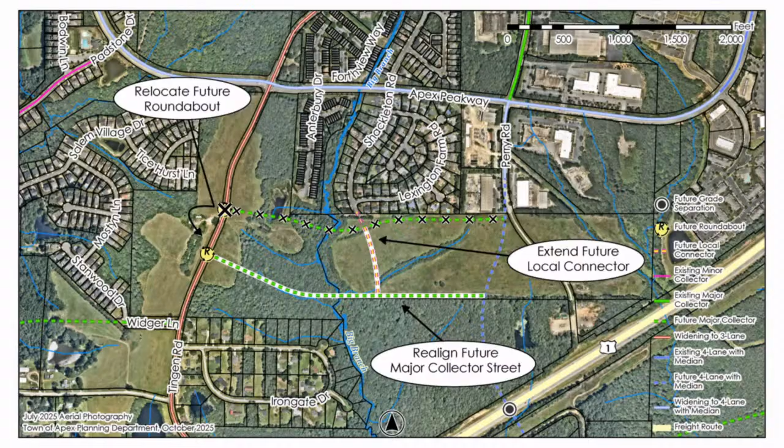Thank you, Shannon. Are there any questions for Shannon? Okay, being that this is a public hearing, we'll go ahead and open up the public hearing for this item. Sir, if you could please state your name and your address.

Good afternoon, Lawrence Kevin, 1628 Salem Village Drive. I was reviewing this. The one thing I read is that the stream crossing is dependent on the Army Corps engineers, so that can factor into whether or not it's going to happen. Stream crossings are generally very expensive, so it'd be nice to have some kind of cost associated. I think Hopson was responsible for 50%. I don't know where the other 50% is coming from. Seymour Tingen is on hold, or it's not happening.

The other thing I want to point out is the way it's drawn, the roundabout for the master plan submitted August 1st for Seymour Tingen had a multi-use area, and that was kind of where you exited out for that. So that's kind of where the roundabout was. The road also does not line up with the plan submitted August 1st, I know it's suspended, but it does not match up with the master plan submitted. That was quite a bit of work involved for the Tingen alignment. Jeff Roach can probably speak to that better than I can. That's just a couple things I want to point out that don't seem to make sense to me, and there's some costs involved that the town needs to consider.

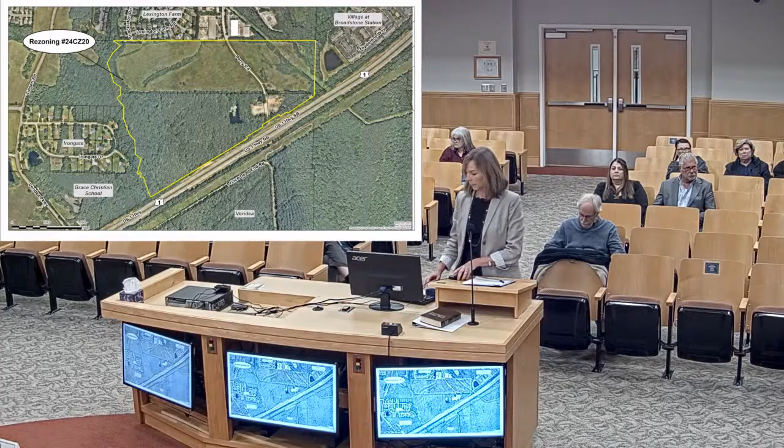So the applicant, Acre Manager LLC, and the Town of Apex have entered into a land exchange agreement, approved by the Town of Apex Council on October 8th, 2024. They've exchanged some property. Perry Road on the transportation plan is supposed to be realigned, and that's where they drew the line for swapping between Acre property and Town of Apex properties. This gives more developable sites for each applicant, giving Acre Manager 58.54 acres, and the town will have 39.62 acres.

The current zoning is residential, agriculture, and light industrial conditional zoning. Looking at the zoning around the surrounding project: this is manufactured housing conditional use, Lexington Farms; Seymour PUD is a plan unit development; Iron Gate and Grace Christian School, which is being constructed right now, is rural residential; and off to here is the Broadstone Apartments, also a plan unit development; and Tech Flex, some existing industrial buildings right here in the light industrial.

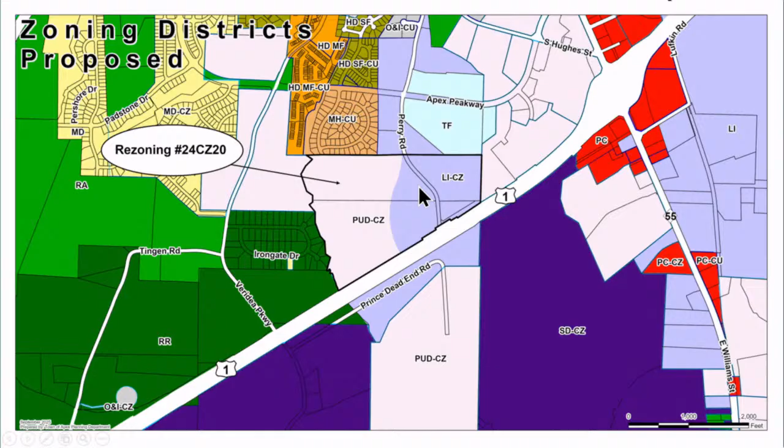So the proposed zoning is planned unit development conditional zoning, and that's going to line up to where Perry Road's going to be realigned, and then light industrial conditional zoning. Looking at the 2045 land use map, it's office employment, and then office employment and industrial employment.

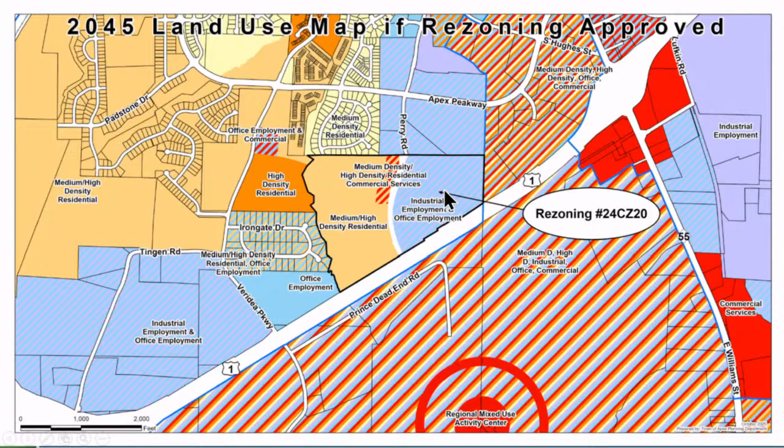So if approved, on the west side of the realigned Perry Road would be medium-high density residential and medium-high density residential with commercial service along Perry Road, and then industrial employment and office employment, which would stay the same for the Town of Apex site.

Existing conditions on the acres include some fields and mature trees along here. There is a creek along the western property line, and on the Town of Apex side, again some fields and mature trees with a pond, and there's a small Town of Apex facility down here.

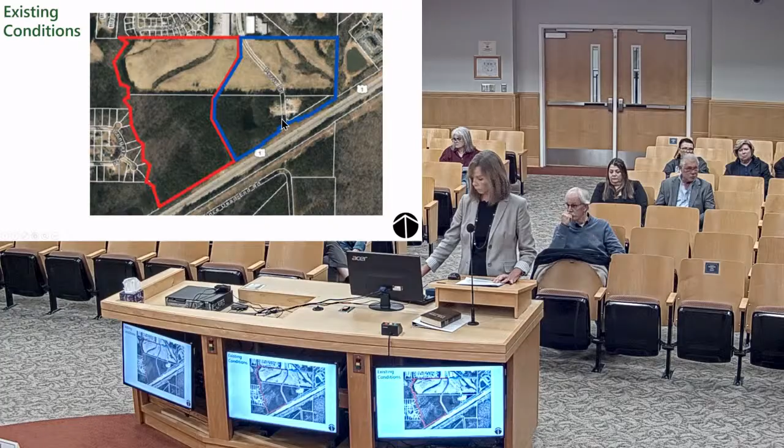A 60-foot type A buffer shall be provided along US Highway 1, except for the electric substation, where no buffer will be required. If other permitted uses are visible through the electric substation or associated lines, those must be screened from US Highway 1, with a 10-foot type A standard.

These conditions state that all other standards of the UDO may be varied based on the financial and operational needs of the Town of Apex, but any changes to the site shall be required to be shown on the site plan for a technical review committee review and comment, and made available to the public on the interactive development map. These variations included...

The existing Perry Road, road improvements to the new aligned Perry Road, the tree survey and trees. Outdoor storage is allowed as a standalone use. RCA relocation to accommodate future development with adjoining properties.

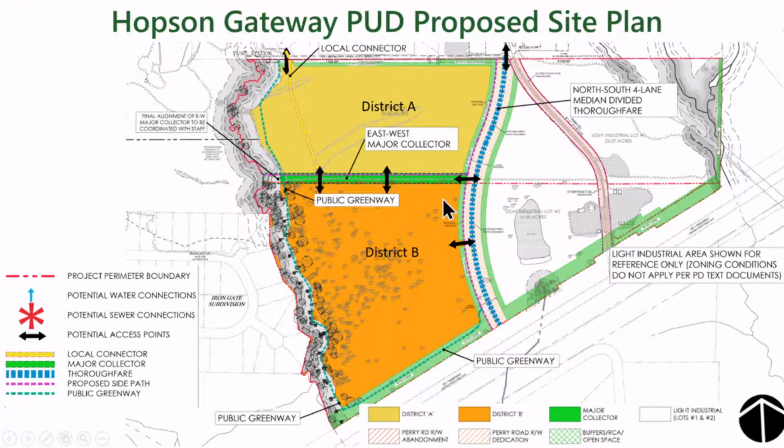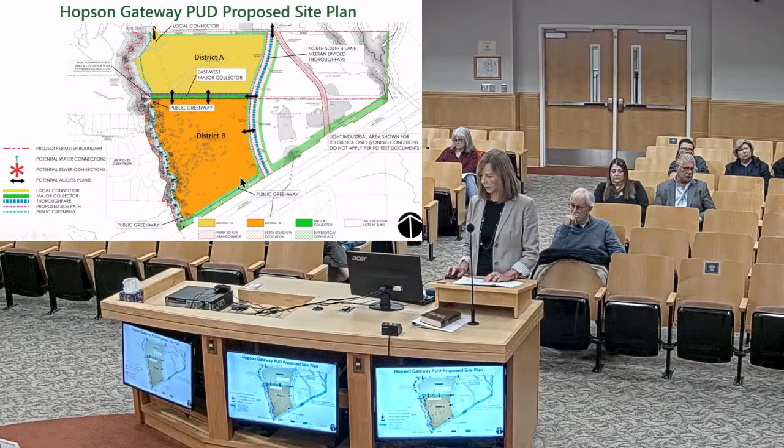There's an existing stub street with Shackleton Road, which will be connected through the development to the major collector. Perry Road will of course be realigned, and these arrows indicate potential access points. A public greenway is located along the stream, and then along the southern buffer from Highway 1 to Perry Road.

Permitted uses for District A are single-family townhouse, live-work townhouse, and small-scale multifamily with accessory apartment, plus recreational uses. For the live-work townhomes, they would be located just along Perry Road, and the only permitted non-residential use in the live-work townhome would be office, business, or professional.

District B would include townhouse, small-scale multifamily, accessory apartment, and recreational uses. The Hopson Gateway site is located within the transit development area, which supports apartment use within the medium-high density residential classification.

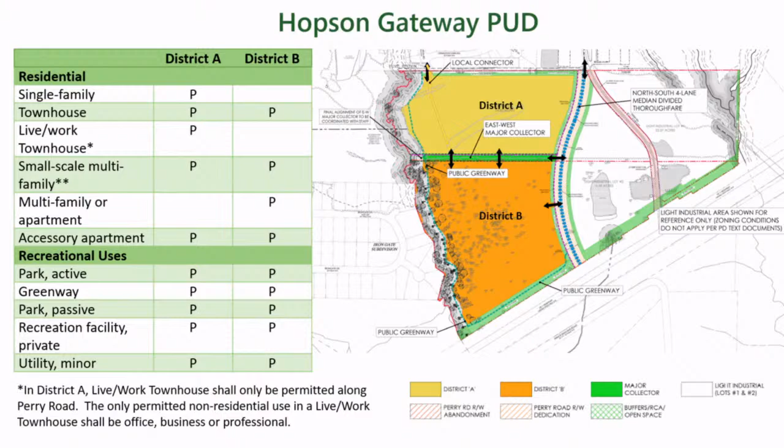There is another condition that says townhouse and/or small-scale multifamily units may be developed and constructed in District B before any apartment units are developed, provided sufficient land in District B is reserved to accommodate the future construction of at least 300 apartment units.

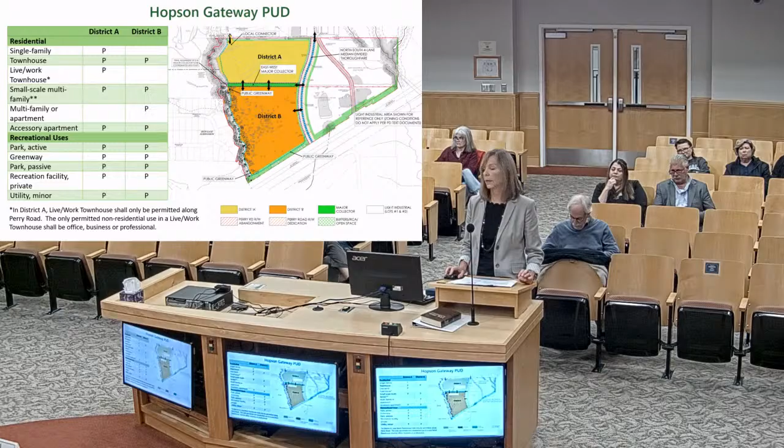Moving on to the transportation improvements: the Apex Peakway and Perry Road intersection includes restriping, additional lanes, and installation of a traffic signal based on NCDOT approval, which involves timing, warrant study, and fee in lieu if the signal is not installed.

For the Apex Peakway and Tingen Road intersection, the developer shall pay a fee in lieu equal to 10% of the estimated cost to design and install a traffic signal and additional lanes.

For the construction of the east-west major collector, this includes bike lanes and a 10-foot side path, and a 5-foot sidewalk on the other side. Perry Road will be designed, constructed, and realigned as a 4-lane median divided thoroughfare, including a 10-foot side path on the Hopson Gateway side, and a 5-foot sidewalk on the Town of Apex side.

The southern terminus of Perry Road shall accommodate the anticipated future bridge elevation over US 1 and additional lanes at the intersections. We passed out 2 additional conditions for easements: a transit easement along the major collector, and a construction easement for the future bridge over Highway 1. Staff and the applicant have been working on these 2 additional conditions, and we're agreed upon that.

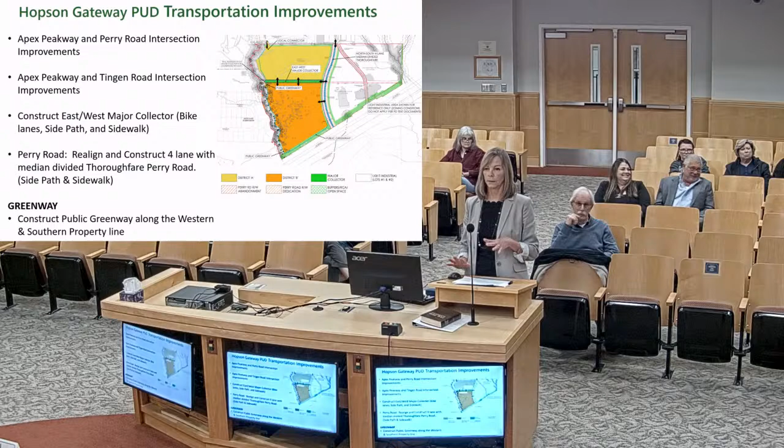Next is the proposed utility plan, just showing the sewer and water connections.

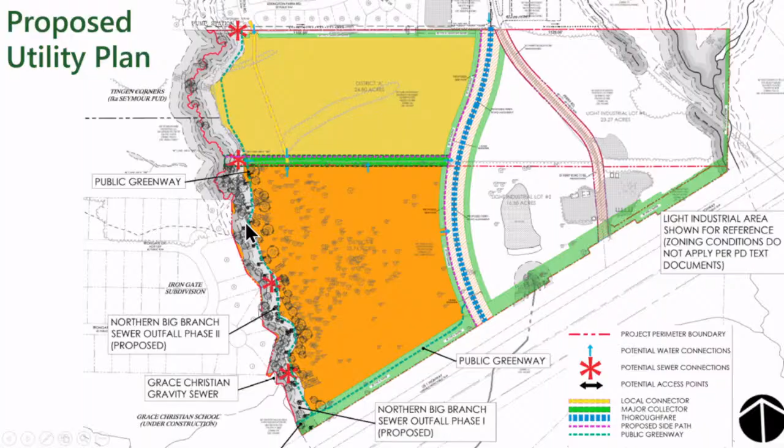The RCA requirement is 20% for this area. Looking at the buffers: 20-foot type B along Lexington Farm subdivision, and once we get up to the light industrial existing site, it'll be a 40-foot type A buffer. Along the west side of Perry Road is a 30-foot type B, and on both sides of the major collector, a 10-foot type B. Along US 1, there'll be an 80-foot type A buffer, and this includes a greenway.

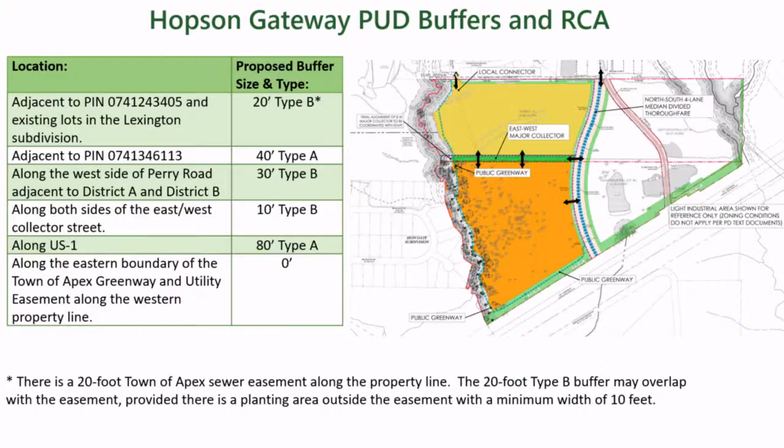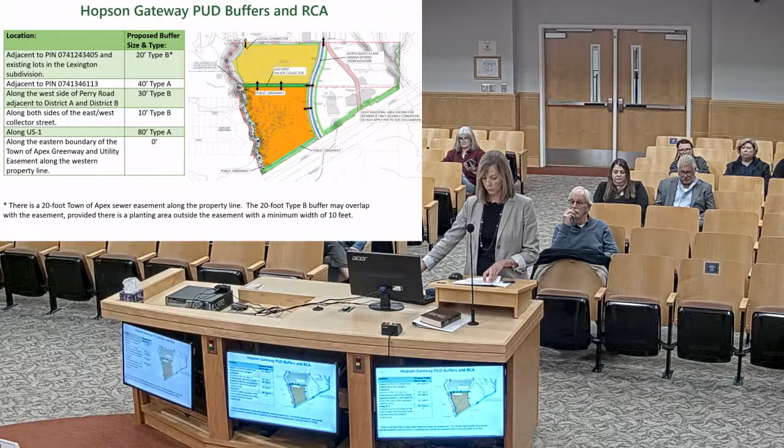The Apex Environmental Advisory Board held a meeting for this rezoning on January 16, 2025, and the PUD includes 6 environmental conditions: native plantings, warm season grasses, green building certifications for the apartments, pet waste stations, and a 220-volt outlet in the garage for the townhomes.

The applicant is also providing an affordable housing condition, a minimum 20% of total apartment units in District B, for households earning no more than 80% AMI, for a period of 30 years. There's also a condition that small-scale multifamily can be developed in District B as long as sufficient area is reserved to accommodate the 300 apartment units.

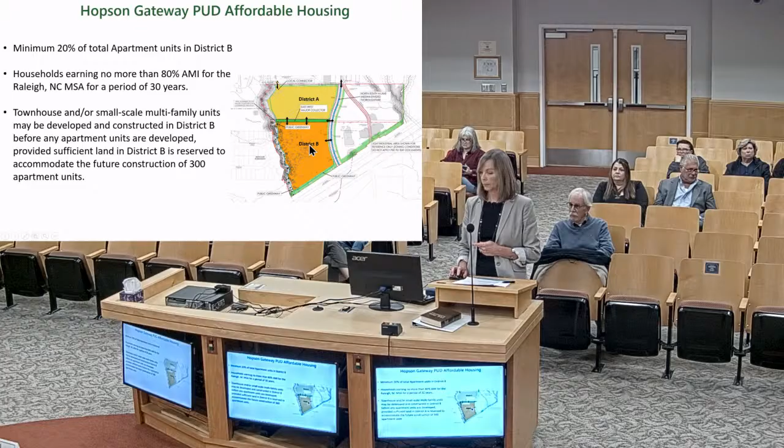For the design standards and architectural conditions, setbacks are included for single-family townhomes, front-loaded, rear-loaded, and parking lot style, apartments and recreational facility. Single-family minimum square footage for the lots is 5,000, and maximum building height is 3 stories or 45 feet, and apartments are 4 stories at 60 feet.

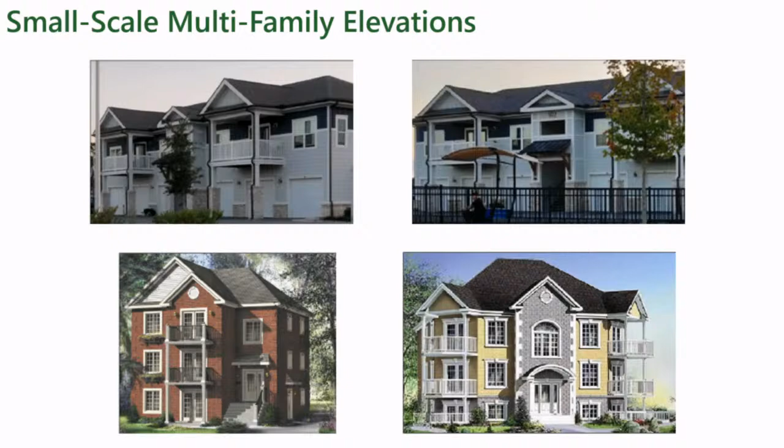Here's some concepts of the townhouse elevations, then the small scale multifamily elevations, apartments, and then the single family elevations.

The architectural conditions address material, trim, garage door design and setbacks, roof line, and color palette, to make sure we have 3 or more palettes for each townhouse and single family.

The parking for apartments: 1 or 2 bedroom units is 1.3 spaces per unit, and 3 bedroom units is 1.8 spaces per unit. All other development will comply with the UDO.

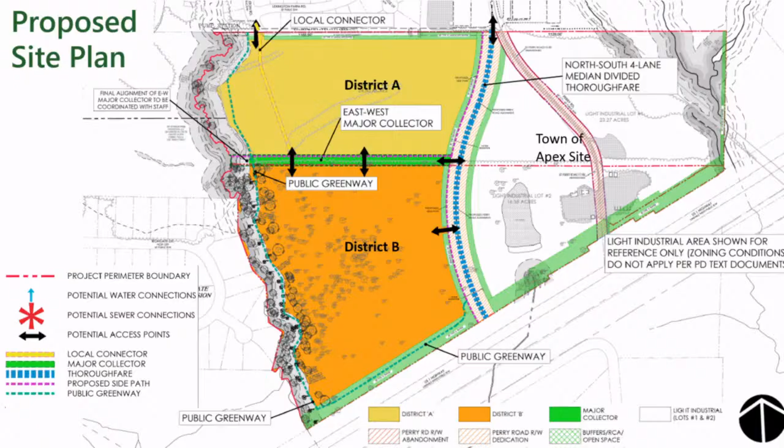On February 26, 2025, the Parks, Recreation and Cultural Resources Advisory Commission recommended a fee in lieu of dedication with credit for construction of the Greenway. The Greenway in District A shall be completed prior to 25% of the total residential units in District A. For District B, the Greenway shall be completed prior to 50% of the total residential units in District B.

The analysis statement of reasonableness of the proposed rezoning: the Town of Apex site rezoning to light industrial conditional zoning is consistent with the 2045 land use map. The proposed Hobson Gateway planned unit development conditional zoning district includes residential densities between 9.7 and 11.5 units per acre, and that area along Perry Road would allow potential for live-work townhomes for office and professional uses within the townhomes.

The Hopson Gateway site is located within the transit development area, which does support apartment use within the medium-high density residential classification. If the Hobson Gateway properties are rezoned as proposed, the 2045 land use map will automatically be amended to medium-high density residential and medium-high density residential/commercial services, per the North Carolina General Statute.

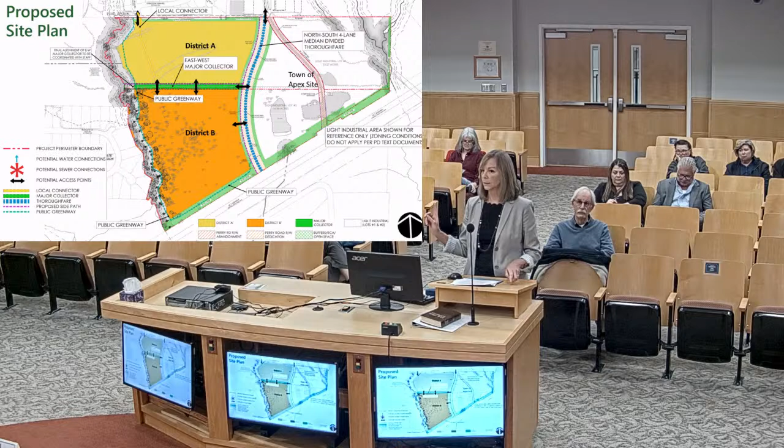If you had any questions, the applicant is here, and I believe they have a PowerPoint presentation. In addition, we did receive 2 emails on October 27th and October 28th in opposition.

Thank you, June. You're welcome. Does anybody have any questions for June?

June, I want to know about Shackleton Road. Will it connect to that? Yes, because that's a UDO policy to connect a road there. With the east-west connector, will they just stub it at the property line, or extend it to Tenjin Road with this development? Just want to clarify, because we saw the map with the realignment showing the full connection from Perry to Tingen, but this development is just going to consider their portion of that realignment. Right, I think as far as the east-west connector goes, that's correct.

June, for that 20-foot buffer between the neighborhoods that already exist, is that what you said, going along the northern part? Yes, that's for the neighborhoods, a 20-foot type B buffer. And what exactly is that, the type B? The type B is semi-opaque, so not completely screened. There are just some areas where you could see through.

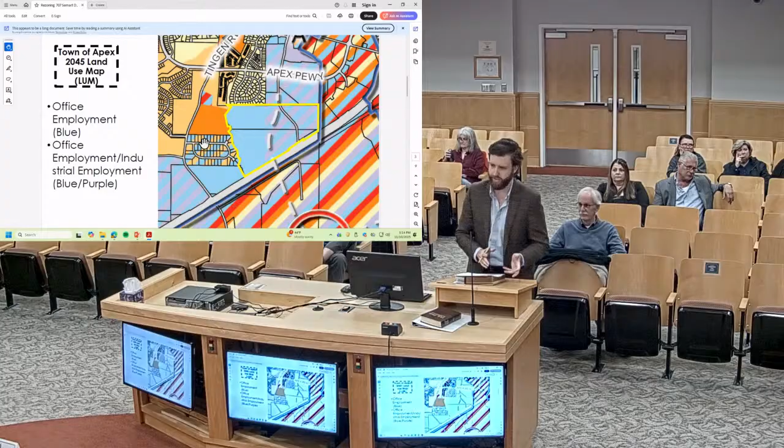The land use map here is office employment and office employment / industrial employment. You can see there's some industrial striping on both sides of Perry Road. With any project in Apex, we looked at this map at the very beginning of the process to determine what uses are appropriate here. We saw a lot of office, which was difficult because of the office market — there's still a lot of vacancy, not the same as it was pre-COVID.

There's also the adjacency of office and industrial uses to established neighborhoods west of Perry Road. So what I'll explain in a moment is how we tried to reconcile the land use map with our plan and the town's rezoning, to determine what made sense here from a planning perspective to transition into residential with those existing neighborhoods west of Perry Road.

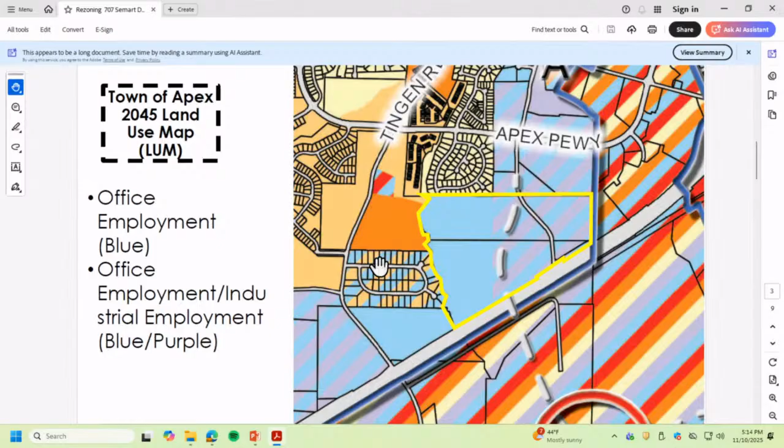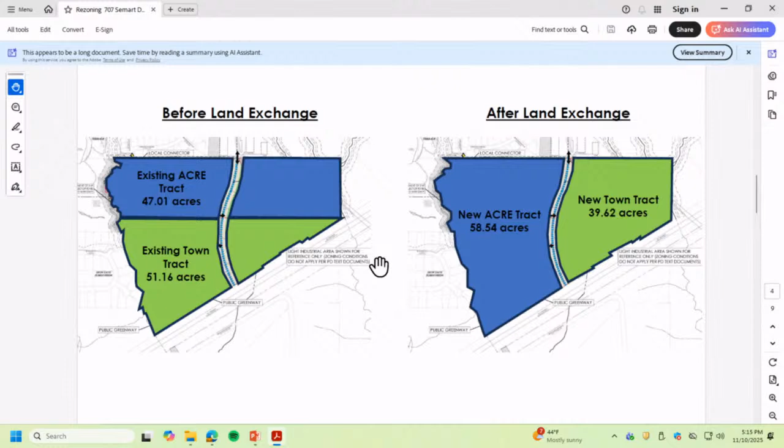The land exchange reconfigures both pieces as shown on the right side of the screen. Acre is getting more land than the town is receiving — if you read the land exchange agreement, they're paying roughly $180,000 an acre for that additional land, so a little over $2 million to make sure it's an even exchange of value between the town and Acre. We wanted to get the land exchange in place in October, and then we filed the rezoning application along these lines.

The blue portion is the PUD we've been talking about, and the green is light industrial. I know June went through that, but if you read the application there are all these different legal descriptions and it's a little confusing, so I think this clarifies it.

The overall concept plan: the white area is the town's property, the LICZ rezoning, and the Hobson PUD is on the left side of the screen in yellow and orange. We have two districts — District A in yellow, which will be townhomes, permitting up to 220 townhomes.

That's a maximum density; we haven't laid out the site. Once we lay out play lawns, RCA, etc., it may be under 220 with the subdivision plan. Separated by the major collector street is District B, a max of 400 townhome and multifamily units. As mentioned with the land use map, the goal was to keep industrial and office uses east of Perry Road and transition to residential on the west side. These tracts are higher in density than some subdivisions to the west.

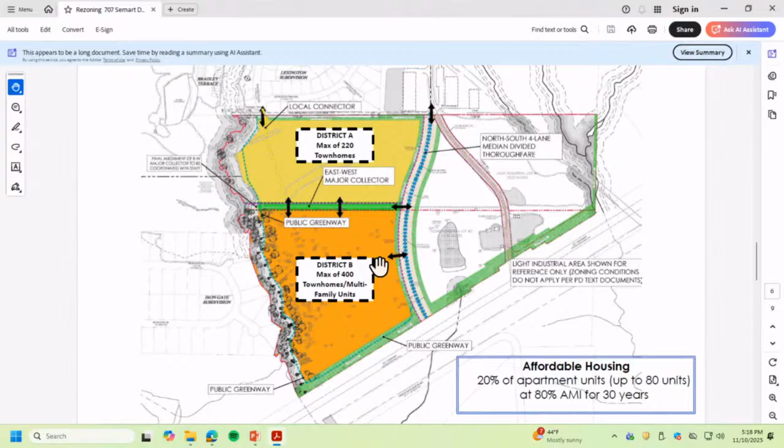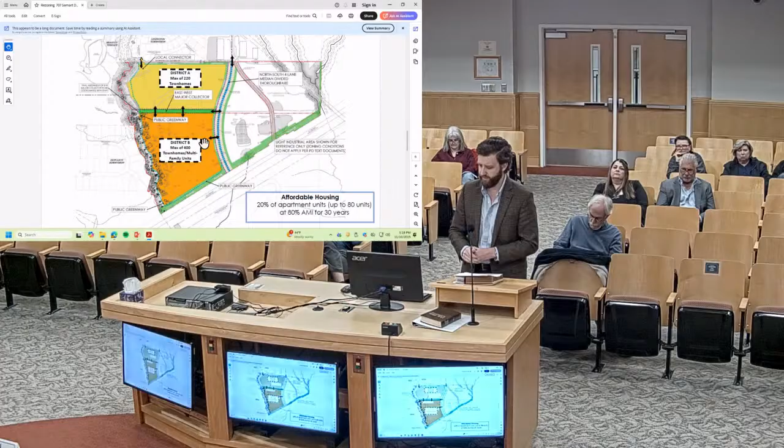The other piece of this is the affordable housing commitment. When we filed this case in November of last year, the town's policy recommended 5% of units at 80% AMI. In June, it was updated to recommend 10%. What we're proposing is 20% of the apartment units will be affordable at 80% AMI for 30 years. If you take that number of units, 80 out of 400, over the whole density of the site, it's about 13%, which is still above the policy recommendation. We also did it for 30 years, where some policy recommendations are for 20, extending it to target a workforce housing range at 80% AMI.

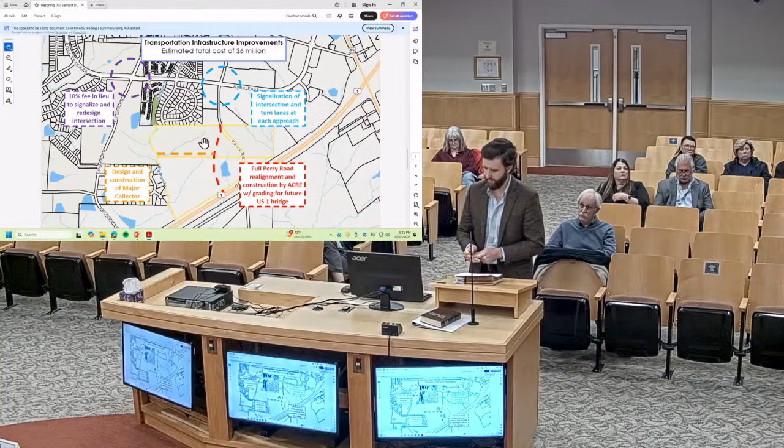The other piece of this is the sewer extension. There are sewer capacity concerns here with existing pump stations, and Jeff Roach can speak more about this if there are questions. This project is extending sewer from south of US 1 to take existing pump stations offline, which is important because the town prefers gravity sewer over pump stations. It's an expensive project, around $4 million. There was an agreement between the Seymour developer, Grace Christian, and Acre to extend the sewer with cost sharing.

When the builder of Seymour fell through, now it's just Grace and Acre. So Acre is handling the majority of that financial obligation to extend sewer, which will be a big deal because it'll be available north of US 1, allowing those pump stations to be taken offline, and also available to residents of the subdivision west of us that's on well and septic.

To summarize, we've got a case with significant public benefits. It's been a long collaboration with the town. It'll facilitate the land exchange and eventually the town's redevelopment of its site. The affordable housing commitment will be up to 80 affordable housing units. There are transportation improvements, sewer extensions, and pedestrian connectivity, which I think June summarized well — that's 1.2 miles of greenways and side paths. Finally, it meets housing demand for the growth that's going to be fueled by the Children's Hospital. For those reasons, we respectfully request your recommendation for approval. Thank you.

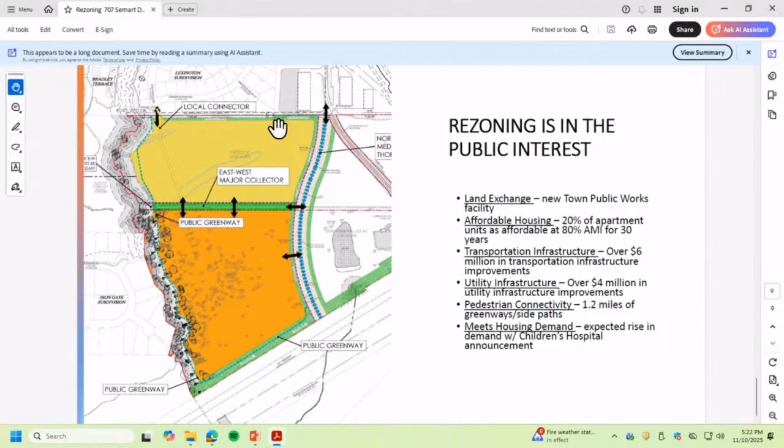Are there any questions for the applicant?

Matthew, other than the signal at Apex Peakway, are there any other offsite road improvements for the northern section of Perry Road, between this front boundary of the land and... No, there aren't. Again, because there are existing industrial businesses along those roads, and we don't control that land, so there aren't. But if those sites are redeveloped, they would have to build their portion of the frontage to the Perry Road section shown on the transportation plan.

Right, because remind me what kind of cross section it is. I believe it's 72 feet wide for the pavement. The right-of-way is a little bigger — I don't know, Jeff, if you have that exact section. Yep, four divided. Okay. And we did add a little additional right-of-way in case this becomes the main road from Veridea to the south, and the road needs to be expanded again in the future.

So I've got several questions, if that's okay. Let me see where to start. I guess one of the first places I'd like to start is with the Kimley-Horn study. I'm looking here, on page 3 of the Kimley-Horn study, and it indicates — this page is a summary. There's table 1 and table 2, summary of the non-res and the res trip gen.